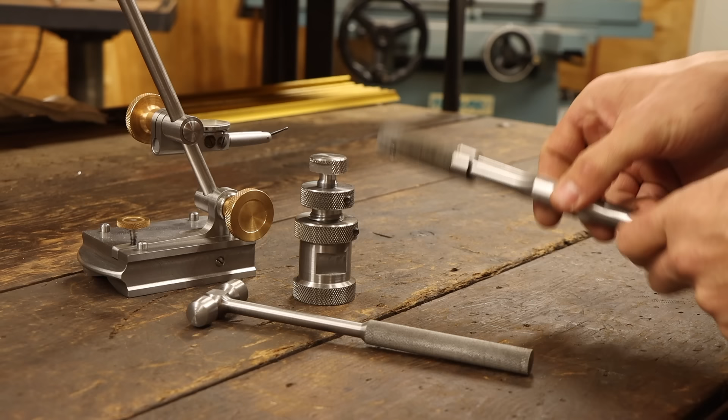Knurling is one of those machining black arts that can either make or break the quality of a part. So you would think that given the number of things I've made with knurling on them, I would have the best tool for the job. But alas, I do not. The only tool I have is this 2-wheel bump style knurler.

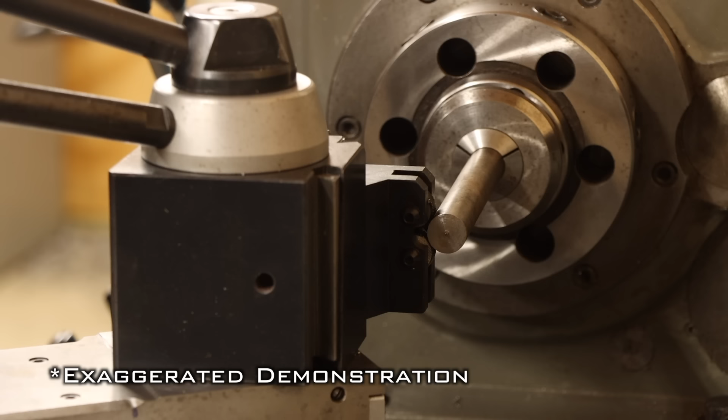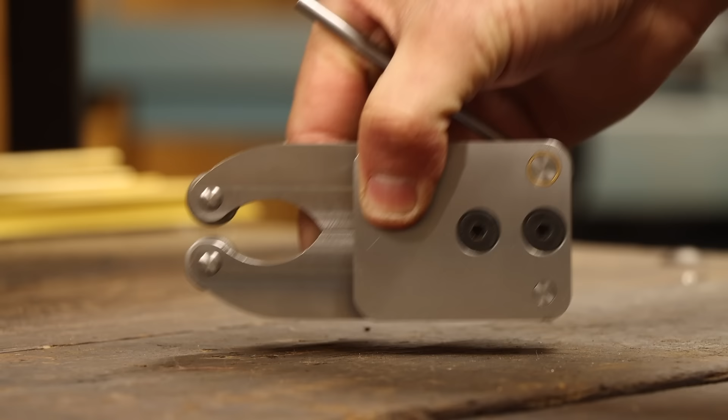And while it works mostly okay, it does have one major drawback. It puts a ton of side load on the part. This not only makes knurling somewhat unpredictable and inconsistent, but also causes excess wear on the lathe spindle bearings and lead screws. This is a big machine, but it's also a precision instrument and doesn't deserve such treatment. So, I'm making a better knurling tool.

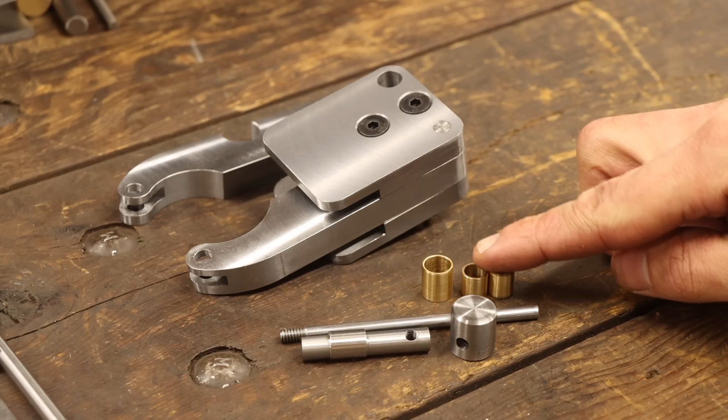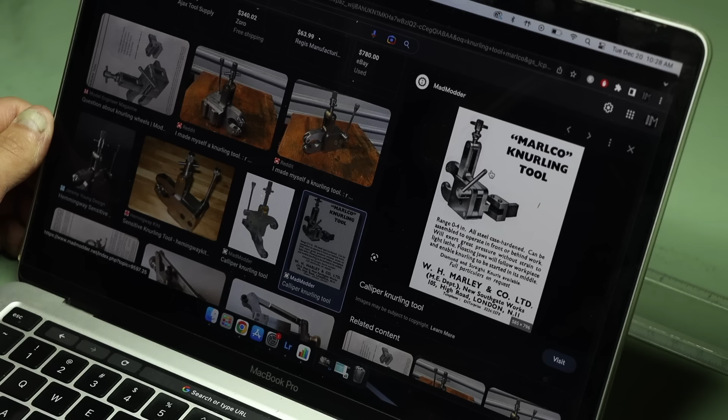While looking for design inspiration, I was perusing Google Images, as one does. I came across the somewhat renowned Marlco clamp knurler design. Aside from having the cool vintage look that I prefer, it seemed to have some very thoughtful design features and also looked very robust. So that was going to be my muse for the planning to come.

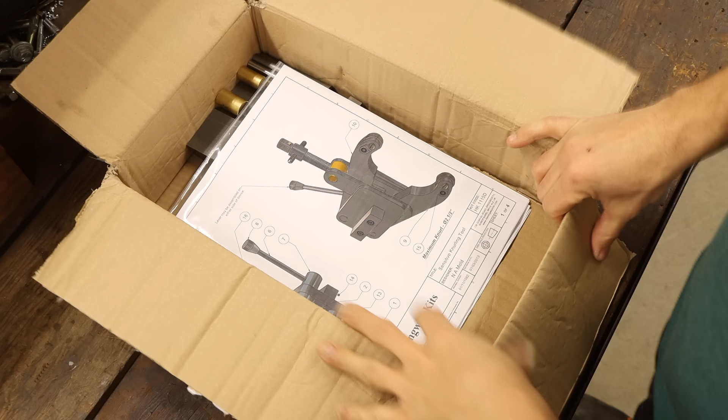But then, quite literally at the same time, a generous patron of mine noticed the troubles of the bump knurler I was using. He very kindly offered to send me one of those awesome Hemingway kits of the exact Marlco design I was looking to replicate, and I wasn't about to turn down that offer. Now I'm going to be careful not to show too much detail of this drawing as it's not mine to share, but I will show some of the features as they become relevant for what I'm doing.

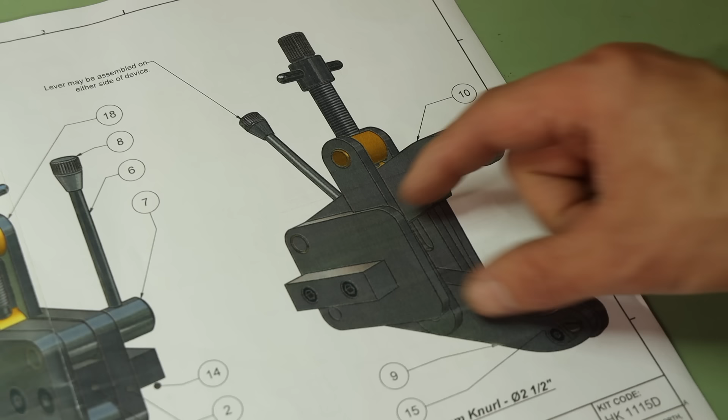The tool is made up of 2 main assemblies. One consists of a pair of clamping arms to hold the knurling wheels, and the other is a threaded yoke that moves the arms in and out to adjust the diameter. The idea is that the wheels can be adjusted open and centered on the work in the lathe. Then a cam lever attached to one of the arms forces the wheels together slightly to engage with the work.

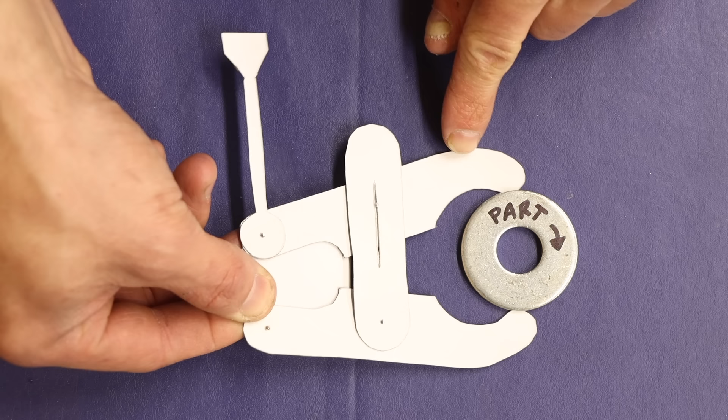It's this pinching motion that's the primary advantage of this type of knurler, since it does not put any load on the lathe's bearings and lead screws. And because the arms are allowed to float, it has a sort of self-centering effect, ensuring a consistent and uniform knurling. This will be a lot easier to explain with the actual tool in hand.

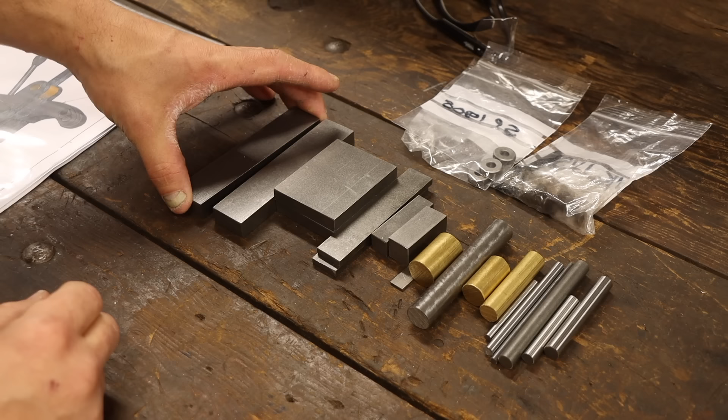I've got the drawings, I've got the materials, nothing left really but to get to work. There are honestly a ton of parts to make for this, so for this first video I'm just going to focus on the clamping arm assembly. And even still, there are a ton of parts to make for this in varying complexity. I'm going to warm up on something that's not too difficult, the side plates.

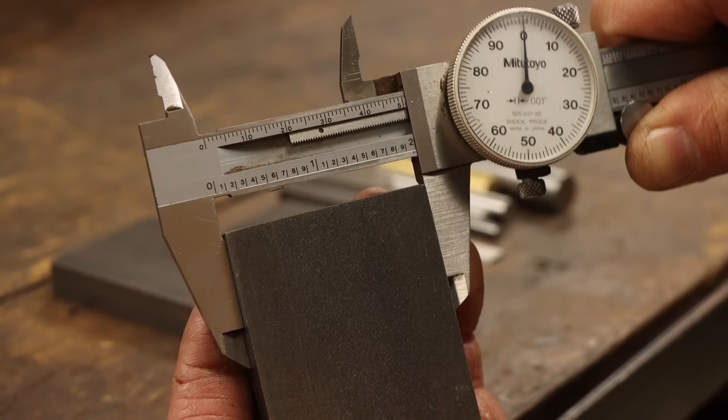They make up the main body of the knurler and include several holes, some simple milled features, as well as some corner rounds. I soon discovered though that the material supplied is already at the outside dimensions of the drawings, meaning the ugly finish from the steel will be visible, and I'm just not a fan of that. So I'm going to deviate from the drawings just a bit and skim all the faces to get a better finish. Much more acceptable. Next are the holes.

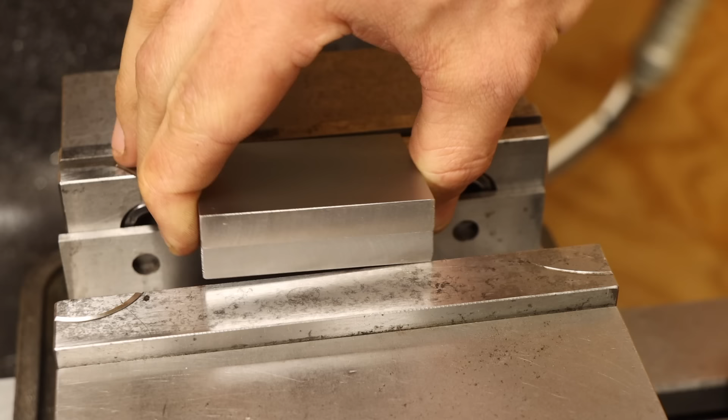Because these 2 plates basically sandwich all the moving components, it's important that the holes on each are in perfect alignment. So to make this easy, I'll drill all the features with the plates stacked. I'll spot drill for each of the different hole locations, then move on to drilling and reaming the 2 corner holes that the arms pivot about. Now I can be reasonably certain that these 2 holes are perfectly in line.

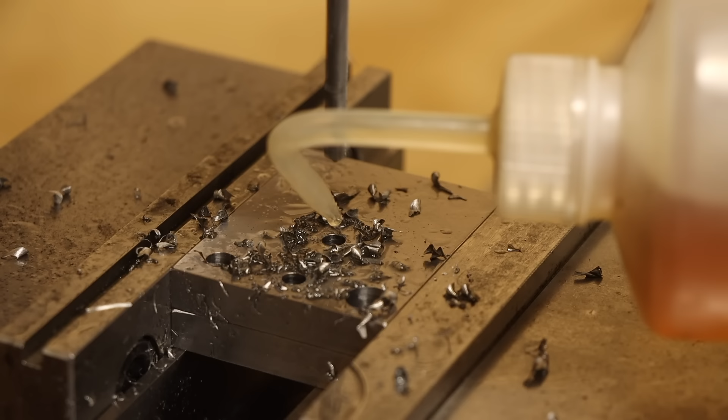The next 2 are for the clamping screws that hold everything together, so I'll drill through both the sides for an M6 tap. All the remaining operations will have to be done separately, so I'll drop the vise stop against my reference edge and remount just the bottom plate. Then chamfer and tap each of these holes. This bottom plate also gets 2 additional holes for a separate tool holder mounting piece, so I'll drill and tap these in this setup as well.

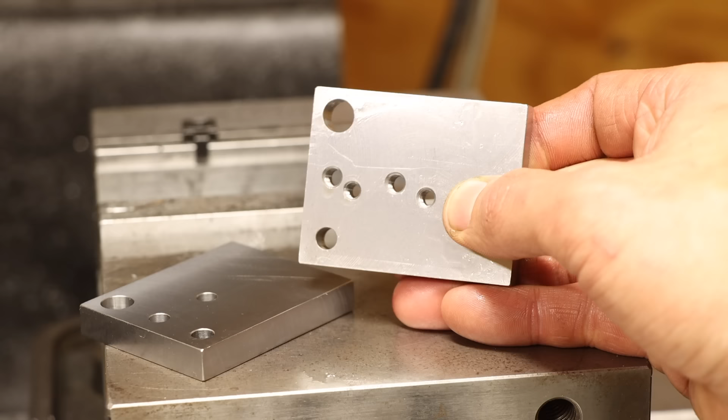Switching to the top plate, I'll chase through the 2 holes, making them clearance for the screw threads, then swap to the 90-degree countersinking bit to form the countersinks for the 2 flathead cap screws. And believe it or not, this bit arrived in the mail literally 5 minutes before I needed it. Talk about impeccable timing. Alright, that's enough drilling for now. Time to mill the rabbets.

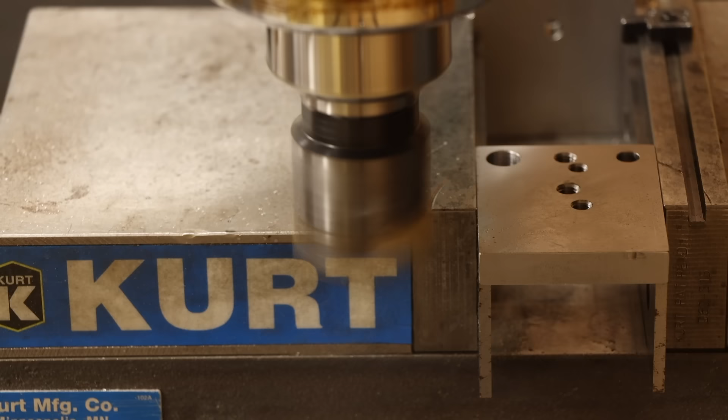I'll clamp one of the plates overhanging the edge of the vise and extend the parallels underneath for a little extra support. I've also clamped the other piece in the opposite side to spare my vise any weird clamping loads that could also allow the part I'm milling to drift out of position. With everything secure, I can mill the rabbets over a series of heavy passes, leaving just a few thou on the depth and width for a lighter finishing pass.

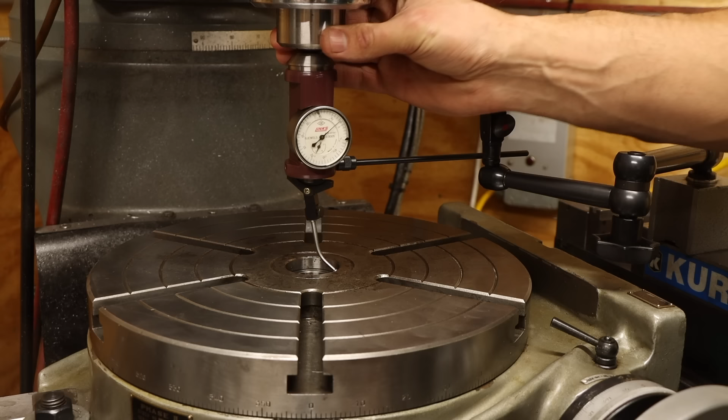Alright, that's all the functional aspects taken care of. Time to round these parts out with some, well, corner rounds. A perfect excuse to use the rotary table. Of course, the first step is to locate the table center with the coaxial indicator. I can then mount a sacrificial tooling plate roughly on center, and mill a shallow pocket such that I'll have 2 reference edges to position my parts against before clamping them

down. Now I can bring the end mill in and sweep the rotary table through 90 degrees to round the corners. Nice. Because all 4 corners of each are the same radius, I can use the same fixture to work my way through the rest. Then, after a light deburring and finishing with some emery cloth, these parts are looking sharp.

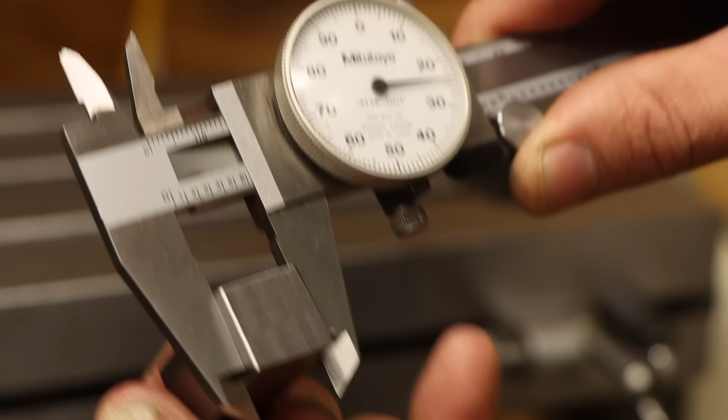Now these were sort of medium complexity parts and they went off without a hitch. Since this next part is much simpler, it should be a piece of cake. This is the spacer block that gets sandwiched between the 2 side plates, and it consists of 2 holes and a rounded end. Simple enough. Much like the first parts though, the supplied stock is right at final dimension. So again, I'll skim these faces, making them slightly undersized but looking much better.

With all 6 faces cleaned up, I'll drop the screw clearance holes in here, and of course just slightly chamfer each. So far so good. Next is the round on the end. So again, I think I'll use the rotary table and mill a new pocket for locating the part. I should note that the pocket corners left by the mill are ever so slightly rounded. So to make sure the part fully seats, I filed the edges to give clearance. With everything tightened down, I can mill the 180 degree round just like before.

Ugh, well that looks like shit. I must have just messed up the pocket dimensions slightly since the radius seems to be off-center. This will be a completely hidden feature once assembled, but I simply can't allow that kind of work to fly. Let's try this again. Fortunately, this is a super simple part, so I can use a piece of scrap steel to get back to the pre-round state in a matter of minutes.

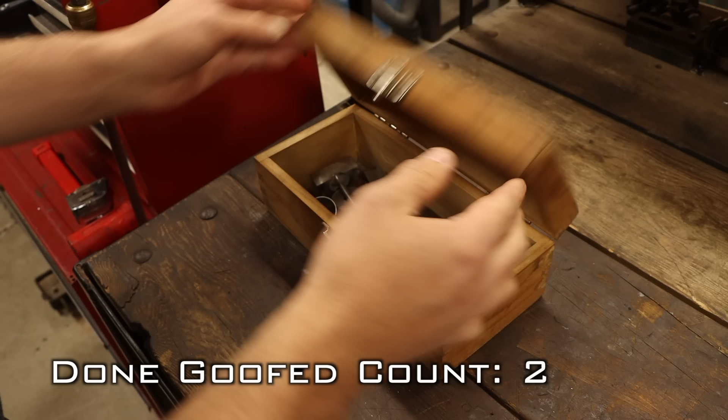This time around, I'll mill a new fixture pocket in the correct position before remounting the new blank and sweeping the table to cut the round. Really? Again? Oh, here's the problem. The part shifted. Most likely from the cutting forces. Actually, I'll bet that's what happened the first time too, and I just didn't notice. At this rate, I'm going to need a bigger box before the end of this project.

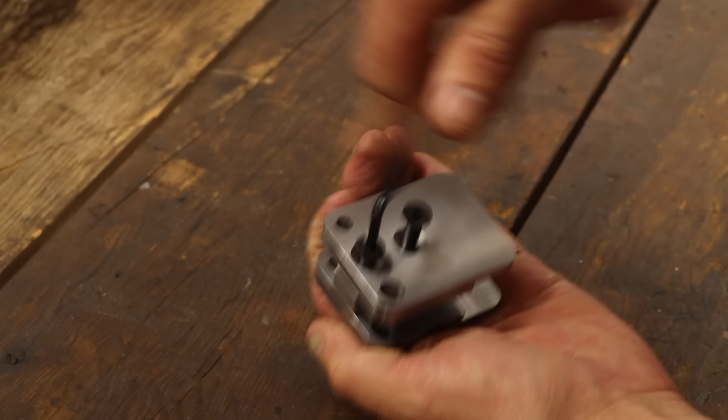For attempt number 3, I'm only going to mill the block to size so I don't have to lose my DRO position on the rotary table center. Then with the blank mounted, I'll cut the round in several lighter passes rather than all at once. This should hopefully keep the forces lower and less likely to push the part out of position. Now that's how that's supposed to look. 3rd time's the charm, I guess. I'll finish this off by drilling the 2 holes, then give everything a nice deburring and test fit on the assembly. Look at that, some actual assembled parts.

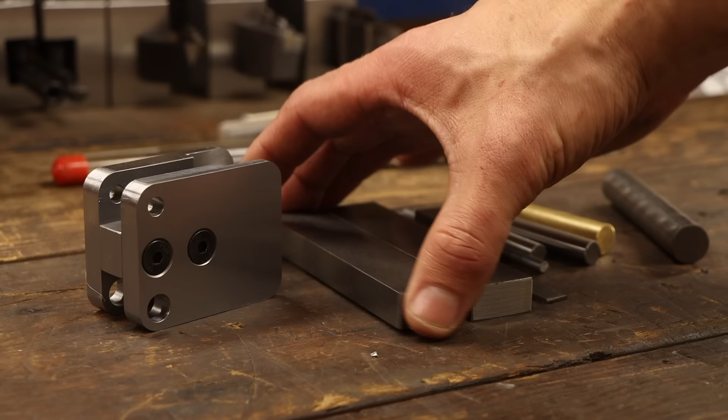I hope I got all my mistake making out of my system because these next parts are way more complex. I'm talking about the arms. These have many rounds and fillets, some of which need to intersect tangentially, as well as some slots, and of course they have some holes, both full and partial. So I'm excited to take these on and see if my plan to machine them actually works out. And just like before, I'll skim all the faces to pretty them up a bit before moving on to the fun stuff.

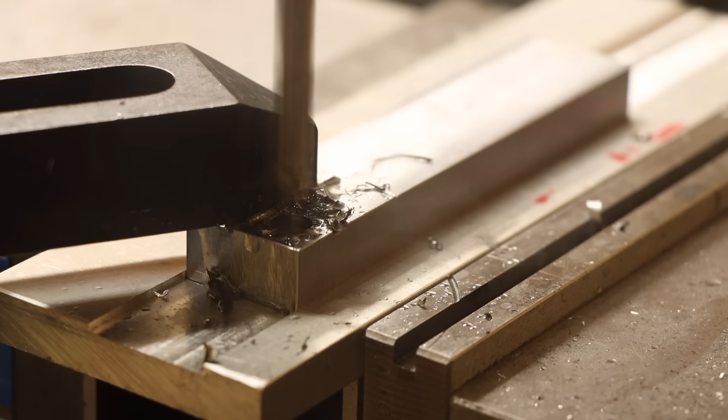And to do all that, I'm going to need another fixture plate, but this one will be a bit more specialized. The first step is to mill a pocket to position the square blanks in. Perfect. Next is to drill several pivot holes to establish the centers of the fillets and rounds. Some of these happen to be on the parts themselves, so I might as well mount one of the blanks and kill 2 birds with one drill. There's 1 on this far end, then 3 on the opposite side, all of which get reamed for maximum precision. That takes care of the pivot holes, but one of the arms also gets the special edge intersecting hole for the yoke mechanism, so I might as well knock that out while I'm set up here.

Drills typically don't like breaking through edges, so I'll start by only drilling a smaller starter hole. Then I can jump up to an end mill to clear out the bulk of the material. This doesn't leave a precision finish or dimension either, so I'm only using an undersized diameter for this, which leaves me enough material to take to final size with the boring head. I'll adjust the cutter out until it touches the starting bore, then bring it out just a bit more for the first cut. Then I can start taking passes and adjusting the head out until I'm right at dimension.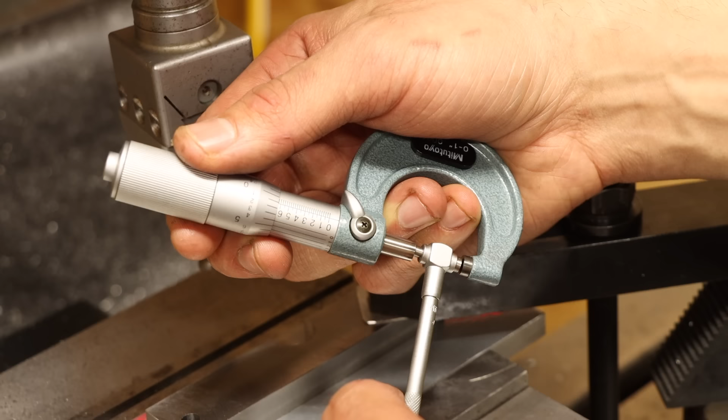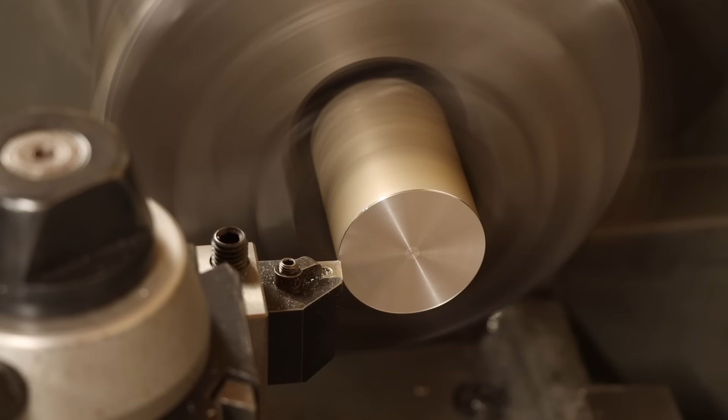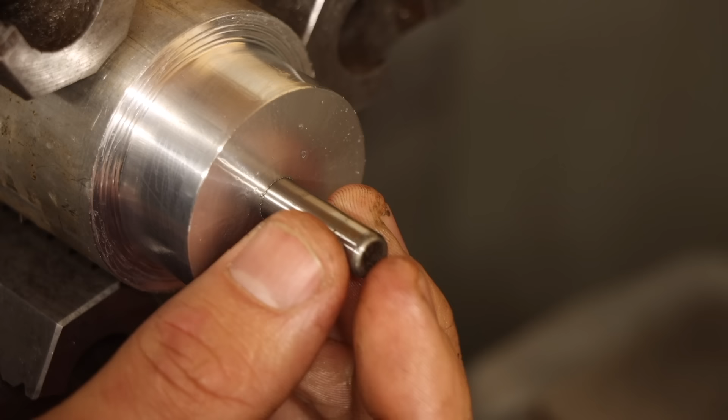Alright, that takes care of the fixture plate and some of the features on the arm, but this isn't quite ready to be mounted on the rotary table. I still need a pivot pin. Fortunately, this will be a quick job. I'll chuck up some aluminum bar stock on the lathe, and face and turn the OD to match the bore of my rotary table. Then I can drill and ream a hole to accept the precision ground 5/16 dowel pin, which of course I have to play with for a bit before parting this off to length.

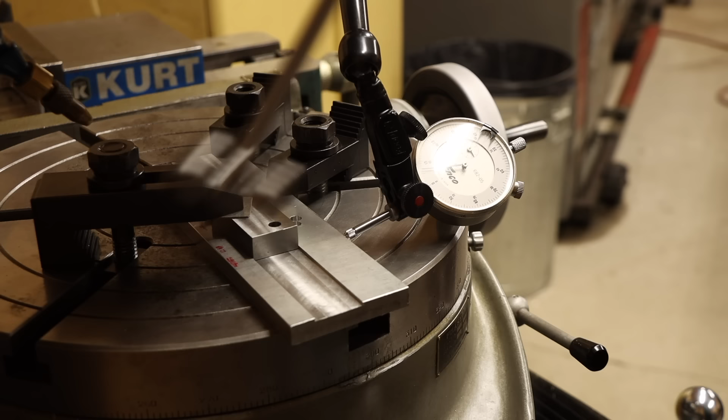Now I can set up on the rotary table. I'll drop my new pin in, then the fixture plate and the partially complete arm, using the precision pin to center it all. With the rotary table dialed into 0 degrees, I'll tram the fixture plate and thus the part square to the mill before locking everything down. The first cuts clear the material forming the inboard fillet, then adding 180 degree sweeps of the table forms the round on the end. That looks perfect. I love it when I can knock out multiple operations in one setup.

The next feature to mill is the large curve on the top side of the arm. I'll swap to a smaller locating pin I made on another occasion before dropping the fixture plate on the correct pivot hole. Then remount the arm and use the 5/16 pin again to locate it within the groove. Finally, I'll retram the plate before clamping it down and taking cuts.

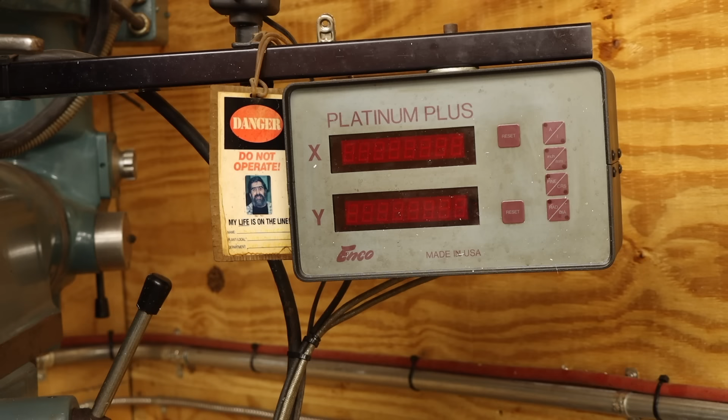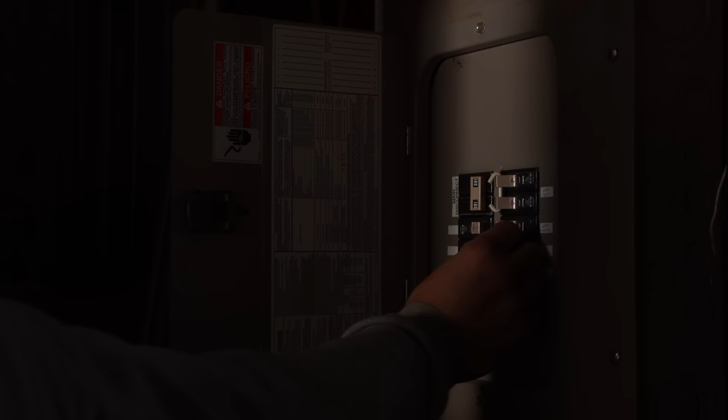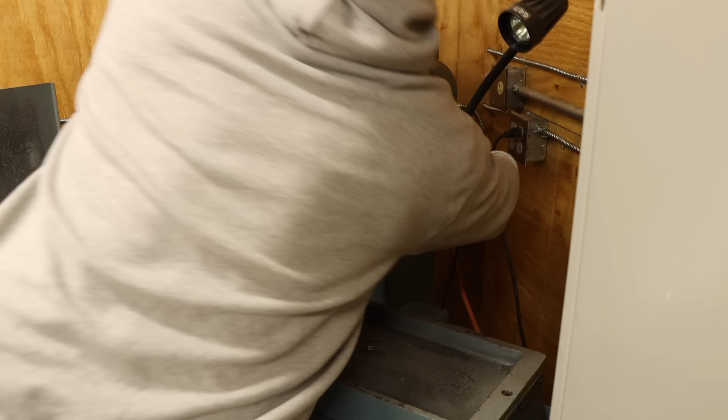But just as I begin to do so, I notice I'm suddenly without a DRO. What now? I trace the issue back to the circuit breaker and immediately realize the problem. My air compressor is plugged into the same circuit as the DRO, which is normally fine, but the negative 5 degree Fahrenheit temperatures of Winter Storm Elliott seem to have turned my pump's oil into molasses. So when it kicked on, it overloaded the breaker. I guess I'll just have to suffer without the luxury of compressed air. Fortunately, I have another cooling method I can use. And there is just a tiny bit of air left to help clear the chips.

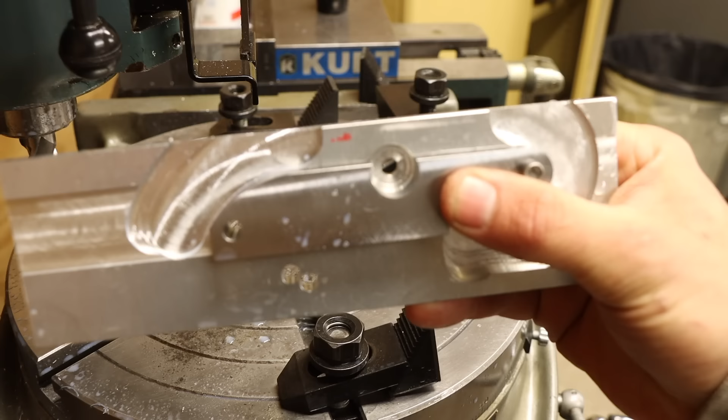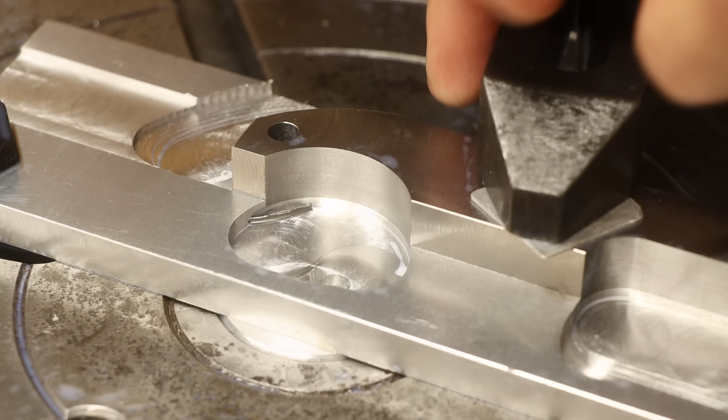Alright, that's round number 2 complete and it's still looking great. I'll remount on the next pivot hole for the inboard fillet, then start taking passes once again to form this feature as well. Now this thing is really starting to take shape. One more round to go.

Literally. This time I'll position the pivot pin on the hole in the end of the arm, then start taking passes sweeping the table back and forth. Since I didn't really do the math to figure out the exact start and stop angles of this round, I'm just winging it, but being extra careful not to go too far. The goal is to get this last round to come out tangent with the fillet and round on either side. About like that.

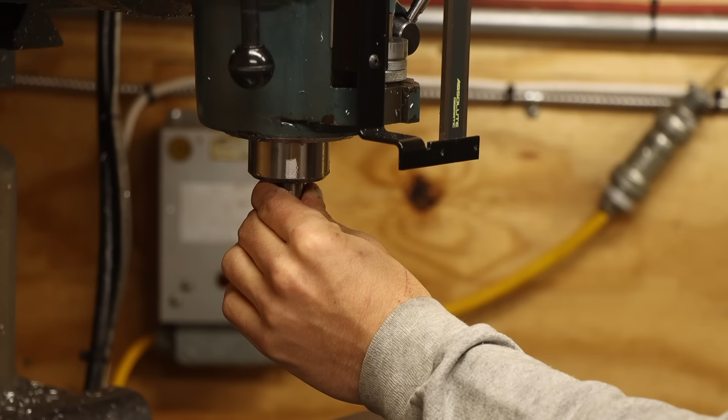The two arms are slightly different in a few areas, one of which is the size of the back pivot hole. So I'll remount this in the vise, switch to the drill chuck. What the? Oh yeah, no compressed air. As I was saying, switch to the drill chuck, locate the hole with a dowel pin in that drill chuck, then drill and ream this out to the larger diameter called out in the drawing.

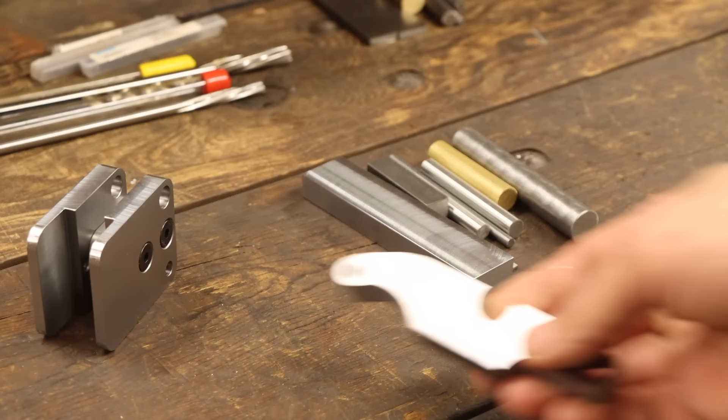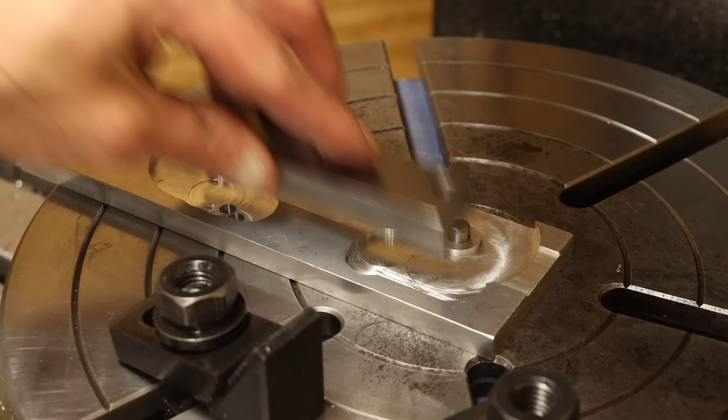Alright, there's still more to do on this part, but while I have everything still set up in the mill, I'll make some progress on the second arm. I want to use the same fixture plate, so my first step is to drill the 2 pivot holes in preparation for that. This arm also gets a slightly different hole in the middle for the yoke mechanism, so I'll drop that in here as well. Then I can jump back over to the rotary table and work on the fillets and rounds.

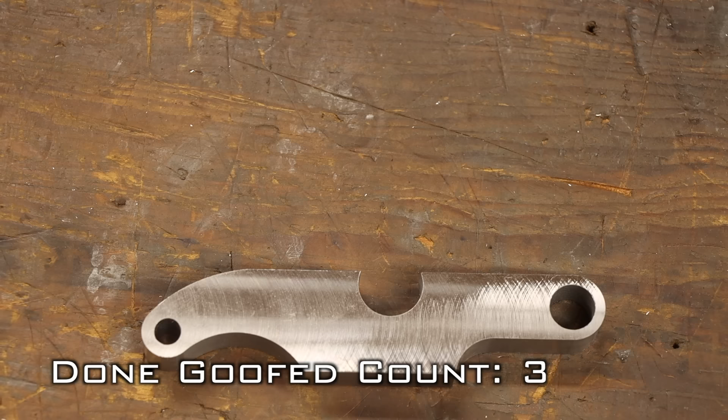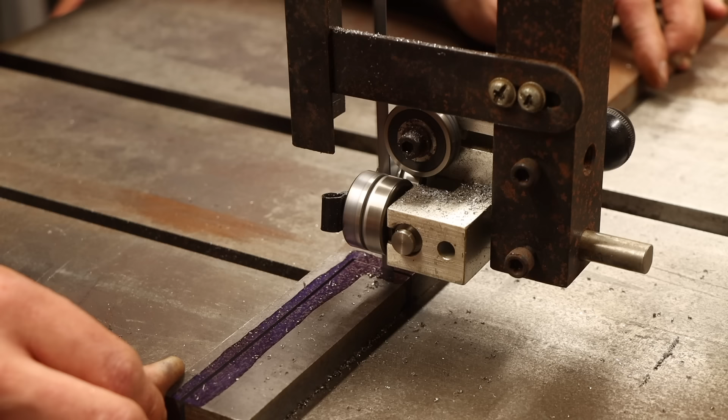First the pivot end fillet, flat and round. Then the large radius on the top side. Except something looks a little off. Yeah, that's not right. Somehow, in my complacency, I drilled this end hole in the complete wrong location. Here you can see the mistake compared to the first arm. Wonderful. I was only kidding before about filling this box on this project, but now I'm not so sure. On the bright side, I had some similar sized stock on hand that I can start over with.

Alright, I'm back to where I left off. A sanity check shows I drilled everything correctly this time. I'll finish this out with the inboard fillet, then knock out the round on the end connecting the two.

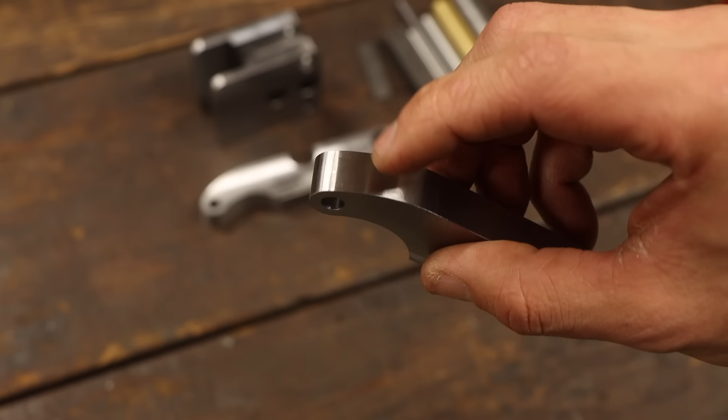That's more like it. I just have a couple more operations to do on the ends for the knurling wheel mounting. First will be the slot for the wheel itself.

There are a couple ways I could do this, but I'm going to use a slitting saw. It's far narrower than the slot I need to cut, but nothing multiple passes can't take care of. So I'll cut the top first, then the bottom, and after verifying all the distances are correct, remove the material left in between.

Perfect fit for the knurling wheel.

The second arm goes much the same, only I made absolutely sure to offset the slot to the correct side of the arm. It would be a major bonehead move to mess something up again, especially at this point.

The last features are some threaded holes on each arm for the knurling wheel pin retaining clip screws. What a mouthful. With the arm back in the vise, I can use the pin method again to find the center of the hole, then offset the specified distance to drill and tap the M3 hole.

And after learning the hard way from my past experiences, I'll use a guided tap wrench on this little guy. If you know, you know.

That takes care of all the big pieces, but there are a lot of little bits and bobs needed to get this into a functional assembly. I'll start with the brass bushings.

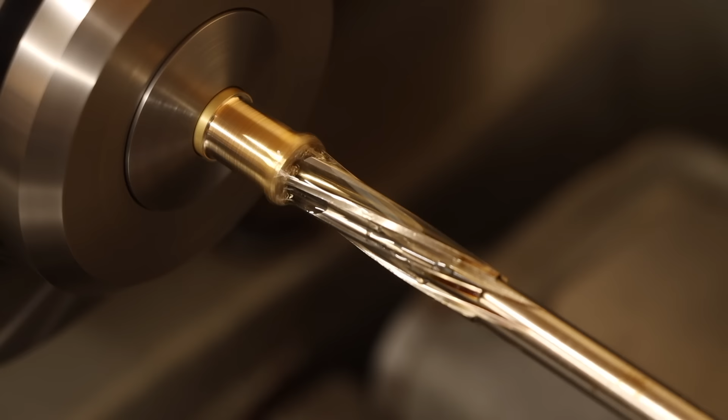These are a super straightforward design with a press fit tolerance on the OD and a nice slip fit on the ID, which I can achieve with a reamer. I really love turning brass. Too bad that's basically it.

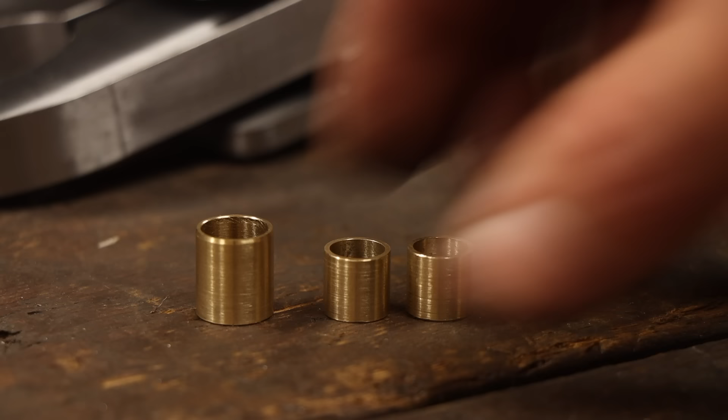But I did get to at least make 2 smaller bushings as well. So I whip those up in the same fashion.

Next is the lower arm pivot pin, which looks to already be ground to a precise diameter. I didn't even think to check the fit before reaming the hole in this arm.

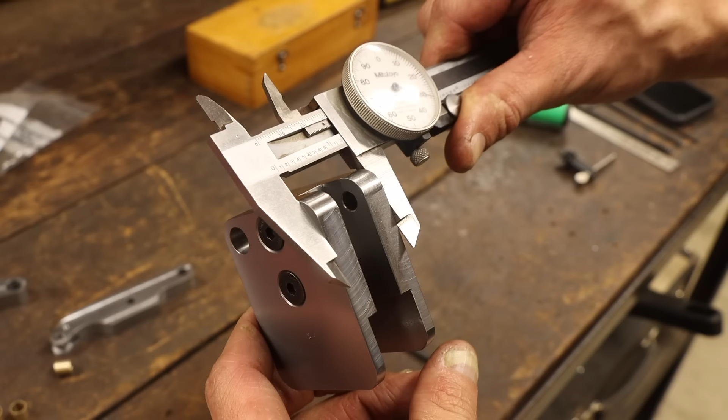Nevertheless, all that's needed are a couple shoulders turned on each end of this pin. Simple enough, except I need to remember to take into account the slight deviations I've been making on the fly.

Next, I'll knock out the cam lever since I'm anticipating needing it for the next part. It's an even more straightforward part in that it's just a rod with a thread on the end. And being that the thread is so short, I think I'll just form it with a thread cutting die.

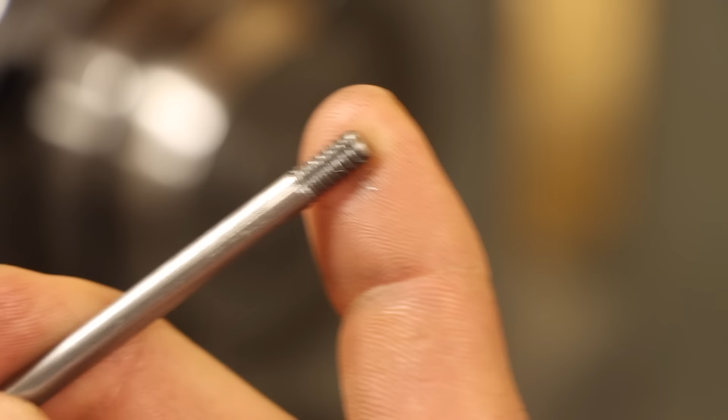But first I'll prepare the end of the rod by facing it square and filing a decent lead-in chamfer to help start the die on center. Then when cutting the threads, I'll apply slight pressure with the tailstock to keep everything square. That should do nicely. On to the next.

The upper arm gets a shoulder pin as well, but this one is a little more complicated with eccentric ends and a threaded cross hole.

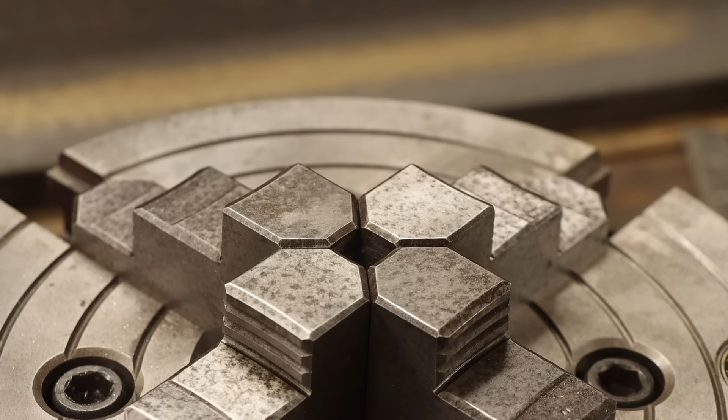The plan I had originally was to use the 4-jaw chuck to position the pin eccentrically while I cut the features. But I only just now realized this isn't going to happen. This is way too small for this chuck.

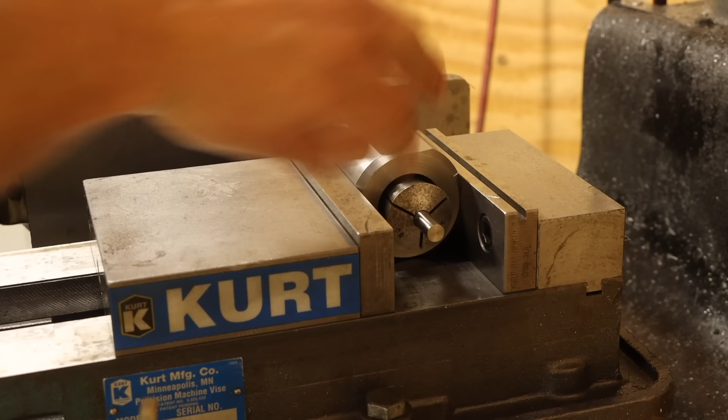I do have a backup plan in mind, but there are a few steps I have to complete before I can get there. First, I'll face one end square in the lathe, then hop over to the mill where I can mount this part on my square collet block.

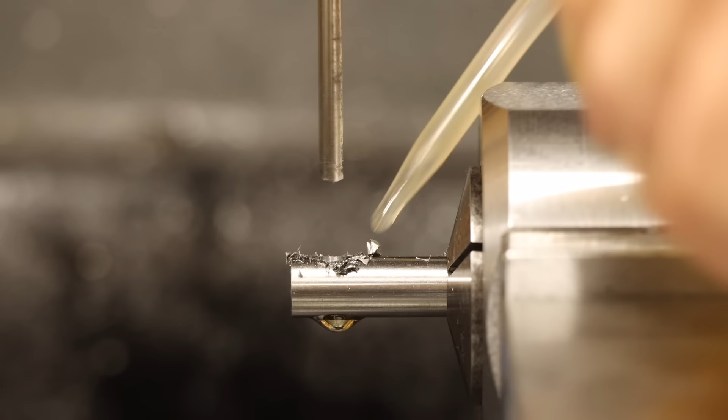I'll use the edge finder to locate the center and the end of this rod. Then I can spot face, spot drill, through drill, chamfer, and lastly, tap the cross hole.

Now for that backup plan I mentioned. Rather than dismounting this part from the collet block, I'll take this whole thing over to the lathe and mount it right in the 4-jaw chuck.

Then I can use the dial indicator to bring it in true by adjusting the 4 independent jaws. Now I need the end of this pin to be eccentric with the major diameter, and the offset needs to be in line with the cross hole I already drilled.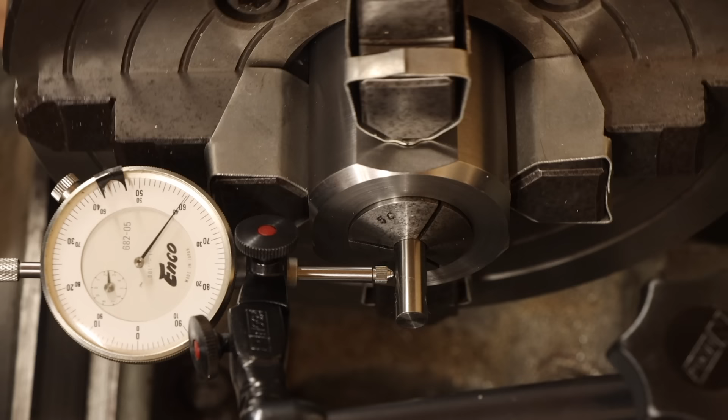Since I never dismounted the part from the square collet block, I know the cross hole is pretty well aligned with the chuck jaws. So I can simply adjust those 2 chuck jaws to dial in the eccentricity that I need.

Pretty neat, right? Then I can just start taking passes until I hit the target diameter, which is a slip fit for the bushing I made earlier. After switching back to the collet chuck and parting off the excess length of the rod, I can grip the first end right on the collet and turn this side as well. This almost guarantees that the two ends come out concentric to one another.

Next up is the lever boss, which is yet another fairly simple piece with a reamed blind hole in one end, a cross hole through one side for the lever arm, and naturally a chamfer on the outboard end.

Finally, I'm amassing quite a small collection of parts here, and since I'm a small child, I can't resist testing if it's all going to work together.

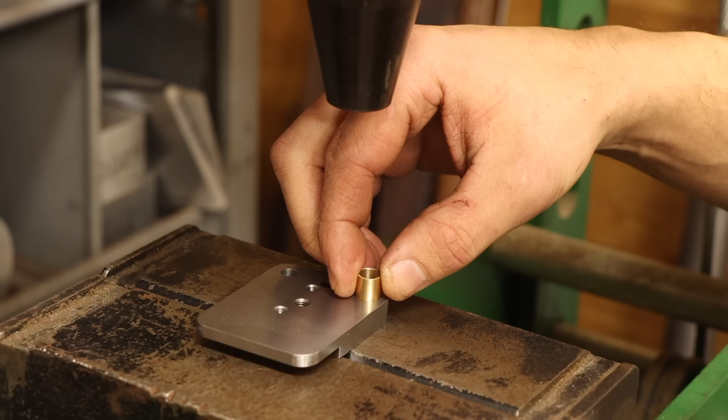First, I need to insert the brass bushings into their corresponding holes, which is a simple enough job for the hydraulic press with a soft aluminum block to protect all the finished surfaces.

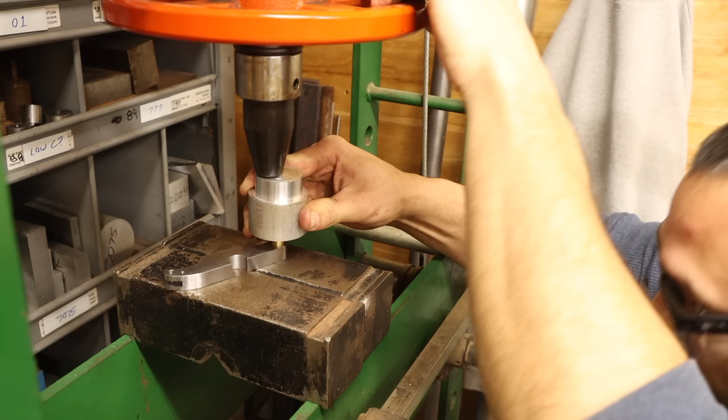The two smaller bushings are for each side plate, and then the slightly larger bushing goes in the top arm. Each of these are only about a 1/1000 press fit, but as it turns out, that's just enough compression to prevent the pins from being inserted.

So I'll take a quick trip to the mill and run a reamer through each of the bushings once again to open them back up. Okay, let's put it all together.

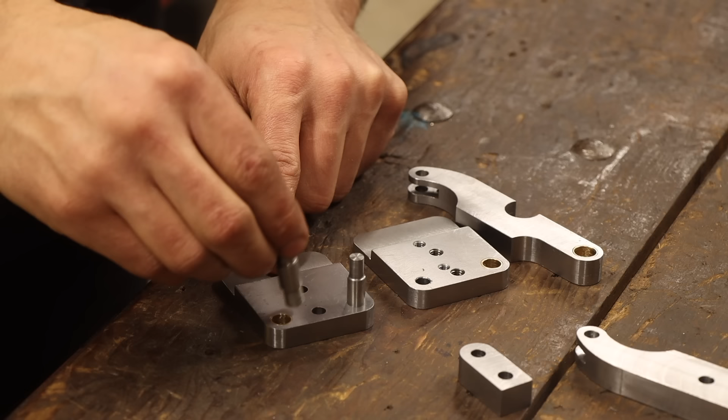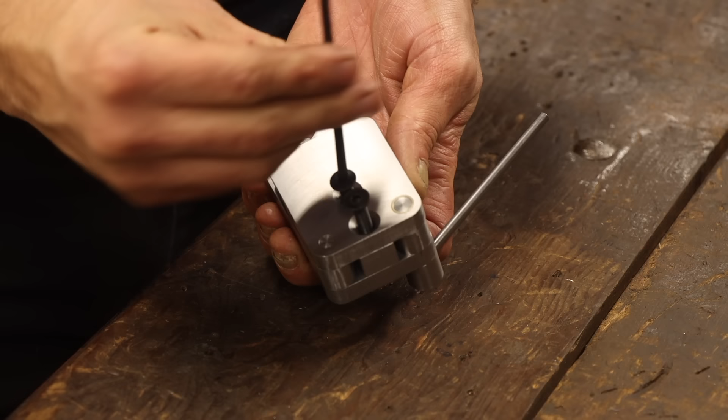Nice, the arms pivot very freely, but don't have a ton of side play. And while the eccentric lever arm is slightly snug, I think it will play to my favor when this thing sees some action. The last thing I want to make for this part of the assembly is the knurling wheel hardware, which consists of slotted pins and these fancy little retaining clips.

I think I'll start easy with the pins. After first squaring up both ends of the rod stock in the lathe, I'll set this up vertically in the mill with the collet block.

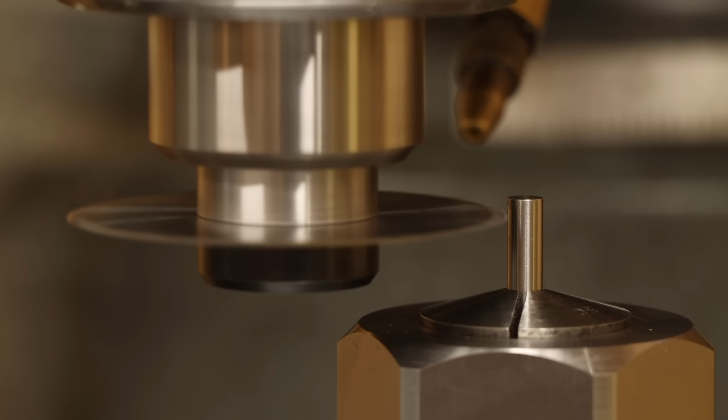Then using the 1/32 slitting saw, I'll cut the 1/16 deep slit near the end, and also do this on the other end of the rod while I'm here.

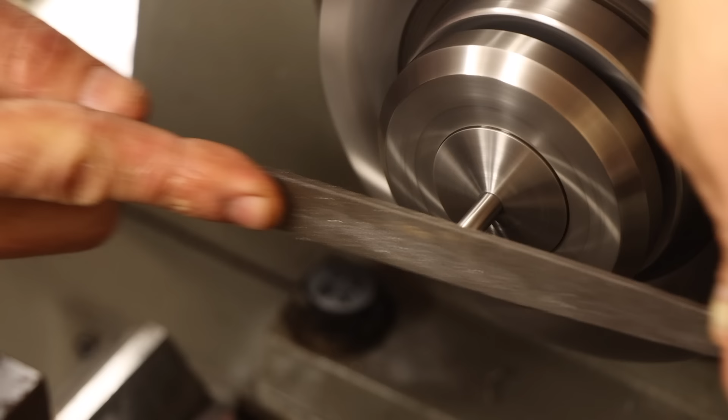Jumping back to the lathe, I'll file a nice radius on the end, part the pin to length, and radius this side too before repeating for the second pin.

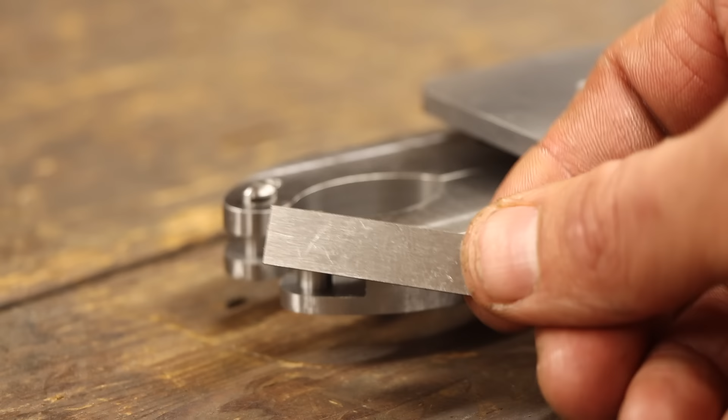The last parts to make are the retaining clips, which will require some very intricate milling on this tiny piece of stock. It seems silly to be using this nearly 3,000 pound machine to make something so small, but with proper setup I'm optimistic it will go okay.

To start, I'll get centered up on the rotary table, mill a shallow slot in some tooling plate to match the width of the stock I'm using, drill and tap a hole right in the center axis of the rotary table, then drop my material in the slot and clamp it down on one end.

I'll drill a screw clearance hole through the stock, and also add the countersink from the drawing, before securing this end down with the flathead screw provided with the kit.

Now I can bring the end mill in to cut the clip to the final width and form the round around the screw all in one operation.

After repositioning the clamps a bit, I can switch to my chamfering mill and cut the thin tab that will interlock with the slots I made on the wheel pins earlier.

Before parting this off though, I'll take advantage of this all being in one piece and form the second clip on the other end. Then I'll switch to a small end mill and cut most of the way through the tab, leaving just a thin sliver to cut through in a final pass.

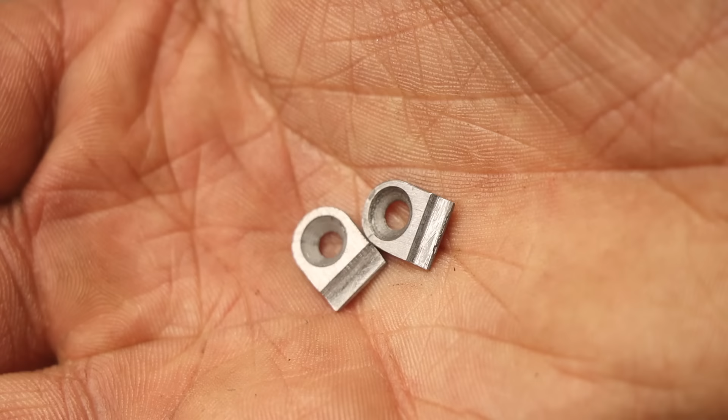Doing it this way reduces the cutting forces and the likelihood that the part will pivot around the screw. Parting the second clip is the same process.

The last detail on these is a simple chamfer on either side of the tab, which I can shape with a few licks of a file. Then put the final touches on these with the sanding plate. And while I'm here, might as well spruce up the other parts as well.

And that about does it for this first part of the build. Despite the few mishaps, I've really enjoyed this project so far. There's a really nice variety of parts in both size and complexity, and each one is like its own riddle to solve, which is half the fun of machining.

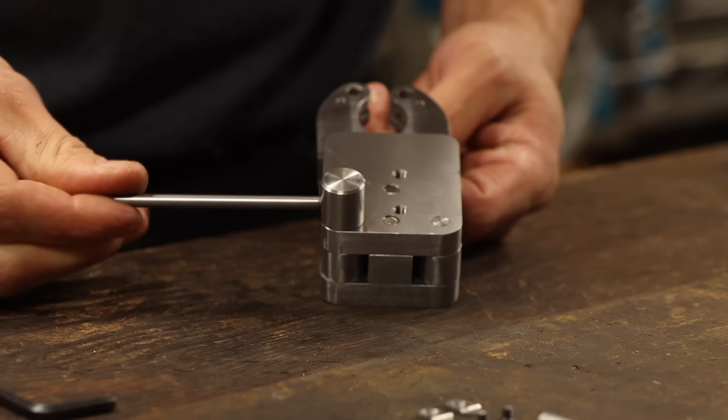So I'm definitely looking forward to finishing out the rest of this build and taking a proper knurling tool for a test drive. And hopefully, just maybe, I'll make it through without any mistakes. As always, thanks for watching, and see you next time.